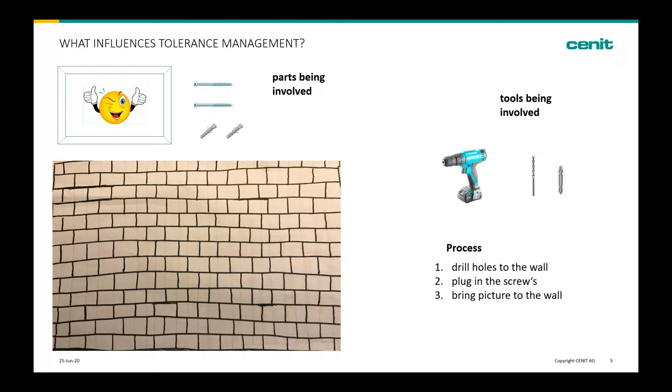So let's do it. First of all, let's create a single part or a sub-assembly — in that case, it's our picture. This is how it should be, or as you probably know, how the CAD world tells you it should be, or as we know it, the nominal. So it's theoretical stuff.

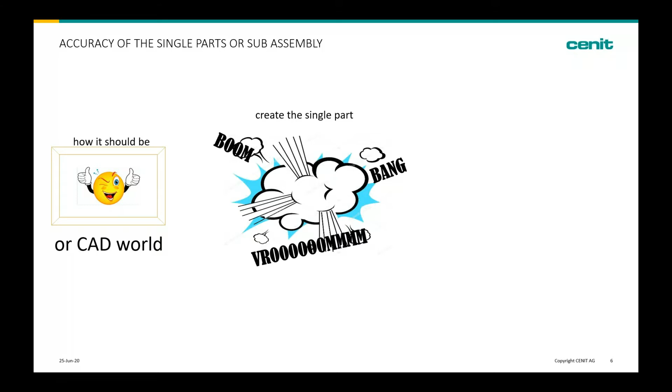But if we start to create such a part, it doesn't matter what we're doing in real production — if we're gluing, screwing, drilling, cutting, bending, whatever we do, we will have a deviation from the nominal. So the single part could deviate depending on how we produce it, and based on the single part deviation, the complete frame will also deviate. So while this is the theoretical world, maybe the picture looks different once production has made the single part.

Now let's take that single part and bring it to the wall. As we said, we follow our process: we drill the hole, we plug in the dowels and the screws, and this will be done with a manufacturing accuracy rule of thumb. So it will go off all right, right? We bring the picture to the wall, and the mission is complete.

So what should I say? Something beautiful is totally something different. So she is not really pleased with me, so we have to change something. We have to change maybe the way how we produce the single part. We have to be more accurate. So let's do a new single part.

What does it mean to be more accurate? We have to spend more effort into it. Maybe we have to use different tools, maybe additional tools like a handling check or a fixture or whatever. So at the end, being more accurate in production of a single part means more time and cost consuming, but we come closer to the theoretical world. How much depends on how much effort we spend and what tools we use.

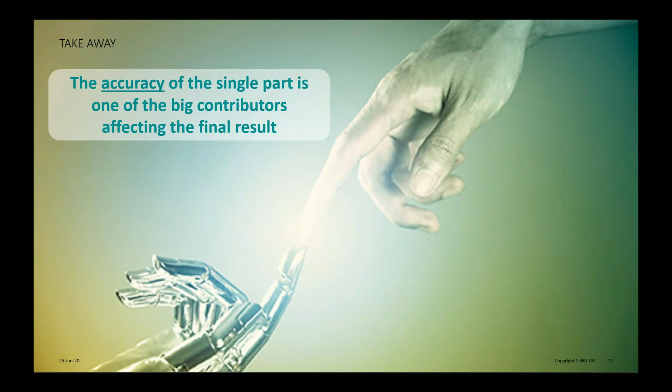And then we can probably have not that big deviation, what we saw in the small video on the other slide. So let's have a takeaway for you: the accuracy of the single part is one of the big contributors affecting the final result. That's the reason why we have on the drawing such strange symbols, or maybe we directly deal in the 3D master or model-based definition world, addressing that information directly to the 3D geometry.

It doesn't matter where you place that information, which you probably know as tolerances. This gives the real production the permission of how much they could deviate from the theoretical stuff and still be okay. Tolerance management is exactly the process to manage how accurate your single part has to be, so that on one hand you're not too time and cost intensive, but on the other hand you meet your targets. So find the best compromise.

So let's take the new picture and bring it again to the wall. That means again follow the process: drilling the holes with the manufacturing accuracy rule of thumb, and you know the sentence would come, it will go off all right. And it looks like that. So mission is completed, the picture is on the wall, and it looks better than the picture we had before.

So we also could have a little simulation and a little video for that. But if we are totally honest, when we bring that to our wife or to our partner in general, I believe they are not satisfied with this result.

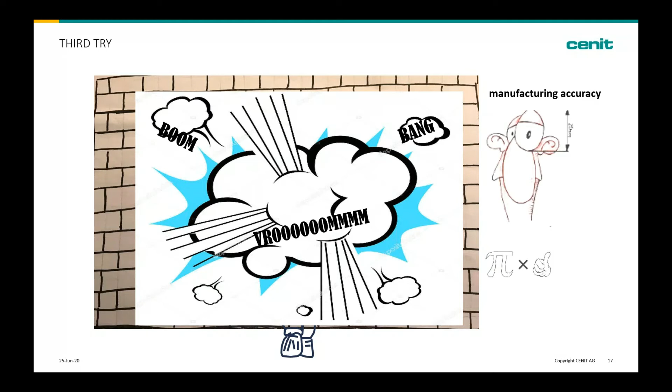So we have to take a little bit more effort and change the next thing. What could we change? Maybe we could change the cycle of mounting. What does that mean? Again, what was our process? We drill the holes, we plug in the screws, we hang the picture on the wall. So maybe it's a good idea to first place the picture on the wall and move it around until it looks quite nice, still staying with the rule of thumb, and then when it looks nice, screw it to the wall.

So what we did here is exactly that way, and it looks good. You see the frames are very parallel to the floor and the picture is on the wall, and hey, of course, the mission is completed.

Having the next takeaway for you guys: not only the accuracy of the single parts, which we already talked about, but also the process of mounting is the next big contributor. And again, tolerance management is exactly about managing when is the best time to bring the part to your assembly line to have the best results.

Let's see what my boss was saying to that final result. Remember, it looks quite nice, but having those grooves in a visible area is maybe not the nicest thing to have. And if you get that statement from your boss, full of agreement, then you know you have to change something.

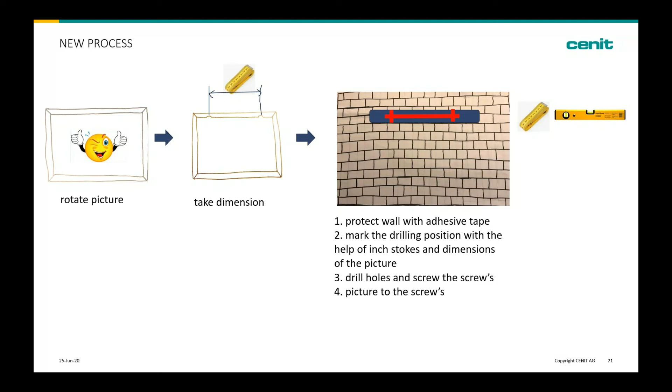The next thing we could change is maybe the manufacturing accuracy, not dealing with rule of thumb. Maybe we have a slightly different process, and maybe we also take into account the spirit level to make a straight line and be very parallel to the floor. Let's follow that new process, take the new tools into account, and see what comes up with that.

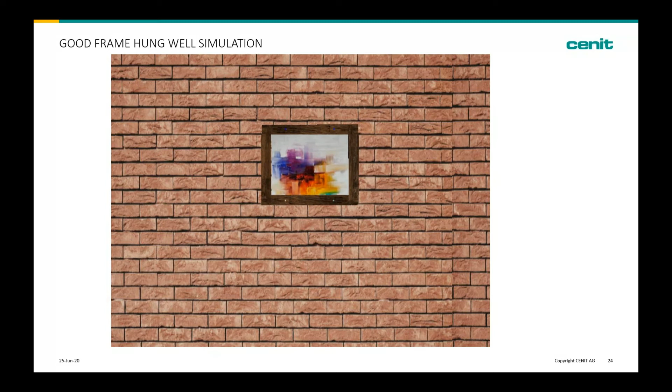And so the mission is completed, and I believe that is the best result we had. So again, what is tolerance management about? Tolerance management is about dealing with the accuracy of the single part, managing that, managing when is the best time to bring the part to the assembly line to make it fit the best and look the best, and also how accurate you have to be in your production to meet the final result. This is what tolerance management is dealing with.

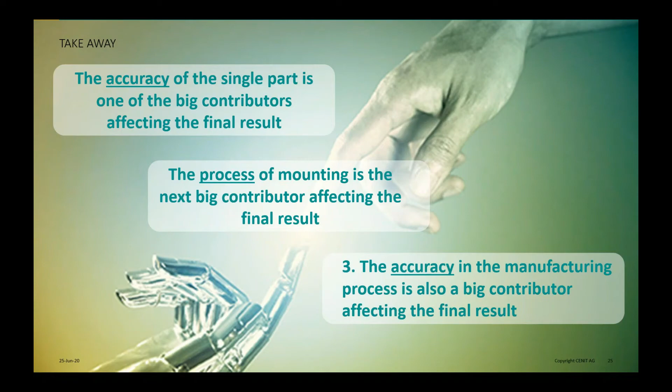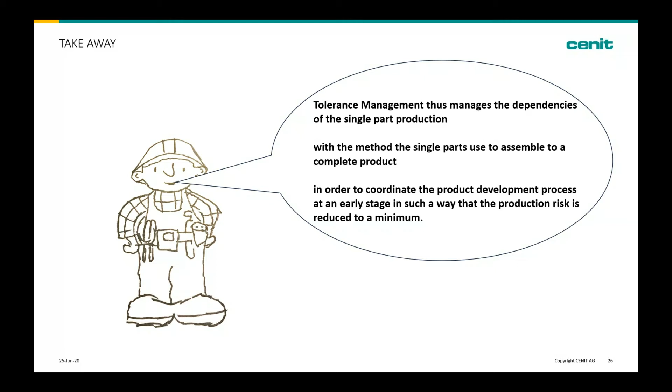So to sum up again: tolerance management manages the single part dependencies in regards to the method of how the single parts will be assembled into the complete product. This way you could minimize production risk to a minimum at a very early stage of your development process. That's the key, to have it in a very early stage. Therefore, tolerance management has to take place in your development process as early as possible. This will help you reach your goals with minimum effort and financial investment.

To look a little deeper into that, let's follow this graph. This graph was developed by the Technical University of Graz in cooperation with KNAPP AG. What they found is that 75% of errors will be created or generated in that area, and 80% of them will be fixed in that area. So that means when we look at the cost share of the error rate, 60% of that share happens somewhere here.

In other words, to make it a bit more illustrative: when we have an error somewhere in the definition phase and we fix it in the definition phase, it may take €1 - forgive me the euros, I'm German, so I think in euros, but you could transfer it to dollars. When you recognize the same mistake one stage later, in the engineering stage, the same mistake that takes €1 here will take €10 here, then €100, €1,000, €10,000, €100,000, and if you recognize it once it's reached the market, the same mistake you could solve here for €1 will take €1 million.

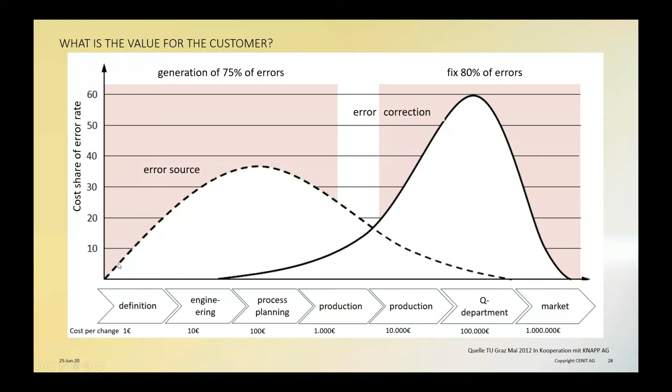We can do it with our digital or virtual prototype, or as we say, with simulation. Simulation can help us make a digital prototype and see what could happen in real production. Then maybe we can really recognize the mistakes directly by setting up the definition at a very early stage.

So what could be a value for you? If we remember the picture example, we had 4 runs: the first was a bad frame, the second was badly hung and bad frame, the third was badly hung and good frame, and the fourth was a good frame, hung well. That means we had a cost-intensive trial and error, and it's a time-consuming thing. So what if we could reduce those 4 runs down to just 1? The result would be faster time to market. And by the way, both companies fully agree with that value.

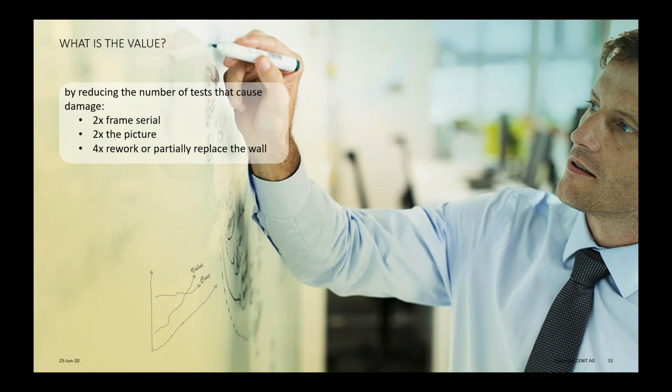Remember we threaded completely, or screwed the picture on the wall by screwing the screws to the picture. So we have to damage the picture for that, and we replace it - 4 times reworking the wall. When it goes not that bad, middle bad, then we probably partially replace the wall. And when it goes totally wrong and bad, we have to build up the wall complete new. Then we're talking about a huge number of costs.

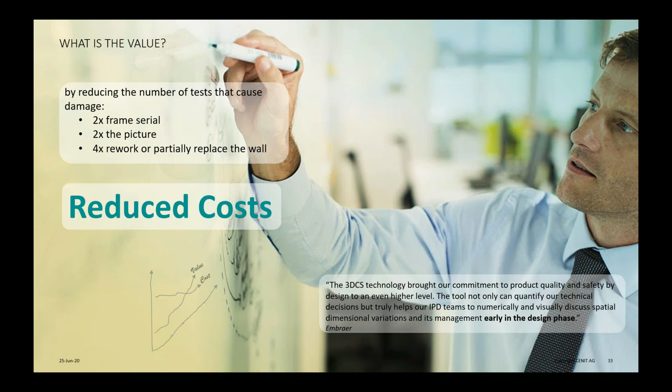So reducing the runs from 4 to 1 means reducing costs. We have a statement from our customer Liebherr, which gave us the idea last year: if we could save 1 prototype over our development, then we have a return of investment on our software integration - just 1 prototype. And Embraer totally agreed to that value.

What is the next value we can talk about? Let's talk about reducing unwanted reworking to save time and cost. How could I explain that a little bit more - what is the meaning behind it? Maybe it's better to explain with a story out of my life.

Except those production sites in China - the dark room production, maybe you've heard about that. It's really production where the production completely runs in the dark because it's fully automated and robots do not need any windows or lights. The only time the lights go on is when they have to maintain the robots, or they have an issue to solve. Otherwise, it's really a dark room and the robots are doing their job.

When we skip that for a while, I don't really know a company that doesn't have the case where they have to rework something in their production. The only difference is whether we're talking about planned rework or unplanned rework. Planned rework means the production knows what to do - they have the space on the assembly line, the tools, the time, the people, and at least the budget.